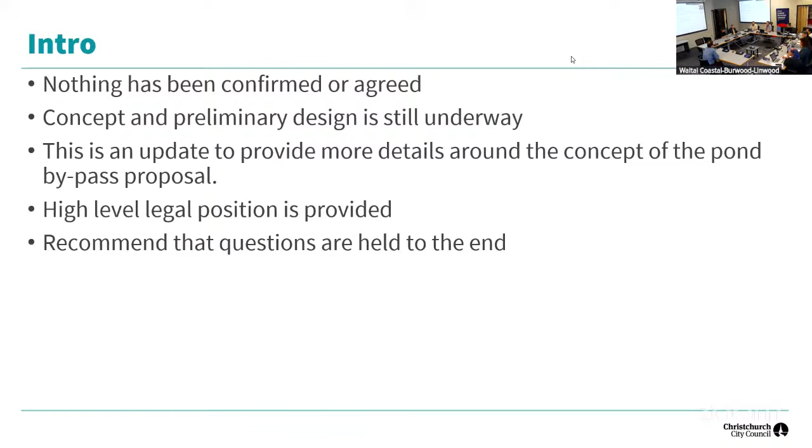What I can say is the concept and preliminary design for the diversion pipe is underway, with a number of council staff working on that plan together. This update is to provide more detail around the concept of the pond diversion proposal. I've also got a high-level legal position in relation to the types of consents we may need — that's not my area of expertise, so I'll essentially repeat what's on the slides verbatim, and that'll be the limit of my knowledge. Again, if we can hold questions till the end, that'll be awesome.

So the agenda: we'll look a tiny bit into the background of why we're here and previous considerations where we've looked at diversion around the ponds in the past. What's the rationale for a pond bypass — why are we even considering it? What would that diversion look like and how would it operate? What are the impacts and risks of that diversion pipe? And we'll go into a bit of detail, since it's been a topic in the media, around the options for disinfection.

That's the chlorine. So a tiny bit of background — you're well aware the trickling filters were lost in the fire in 2021. We installed a temporary activated sludge plant in early '22. Late '22, we installed 16 aerators on pond 1. And 2028 is when the new activated sludge plant is forecast to be completed, replacing the full treatment capacity lost when the trickling filters were destroyed.

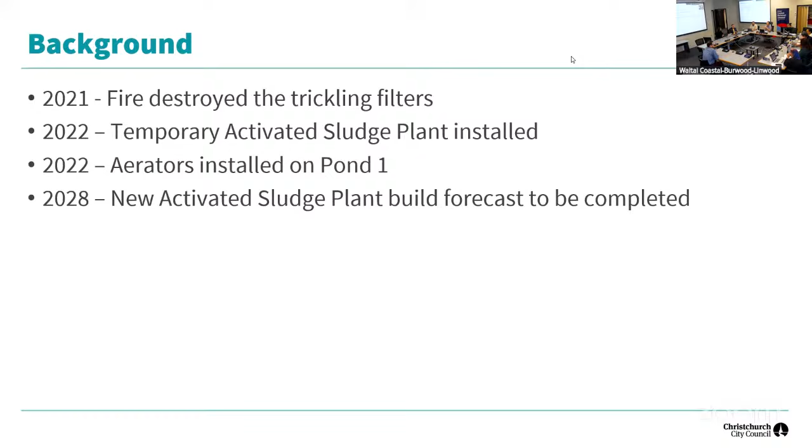Believe it or not, diverting around the ponds is not a new concept. Every time you consider a large upgrade at the CWTP, you have to consider a range of options — do nothing, renew, replace, or do something different. Diversion around the ponds has been considered previously. In 2006, with the ocean outfall, there was consideration of whether we needed the ponds at all, or could go straight to the outfall. But it was decided we needed to keep the ponds.

In 2018, when considering the impact of midges on the surrounding community, we again looked at diverting around the ponds, but instead went for the midge management programme, tackling different stages of the midge life cycle, which was better value than the cost of full diversion. In early 2021, before installing the temporary activated sludge plant, we again looked at all options including bypassing the ponds, and decided the temporary plant was preferred. Again in 2021, aerators on the ponds were preferred over diversion. Each time, pond diversion wasn't selected due to other options having restrictions, environmental benefits, or ability to implement.

The biggest risk of diverting around the ponds is that what comes out the back of the CWTP has a lot of fecals and enterococci, which is harmful to human health. That is the big thing that stops us from typically diverting around the ponds.

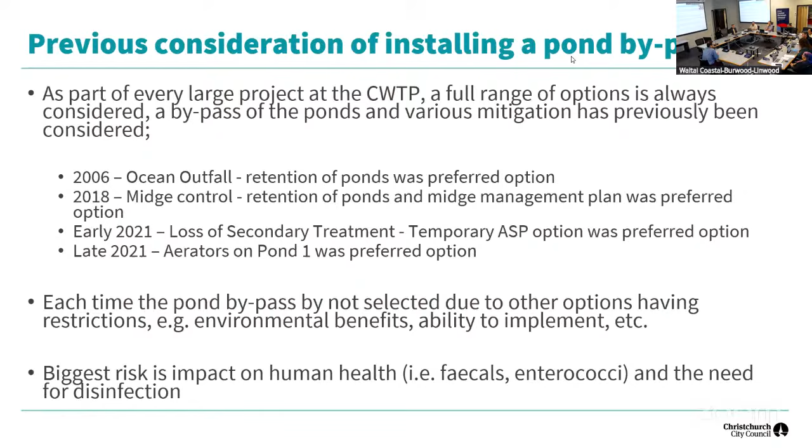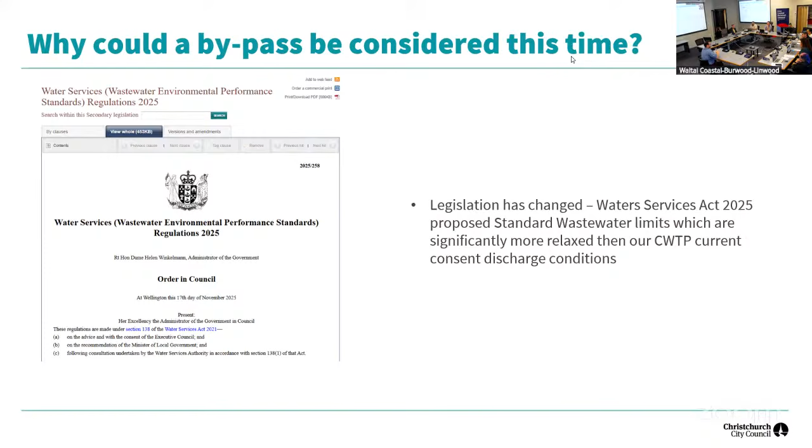Legislation has changed. On the left-hand side is a screenshot of the Water Services Regulations Act 2025. What that did was propose standard wastewater limits, which are significantly more relaxed than the CWTP consent discharge limits. So whereas the current consent limit might be here, under the new wastewater standards there's the option to go a lot looser, so you're allowed to discharge more contaminants to the environment.

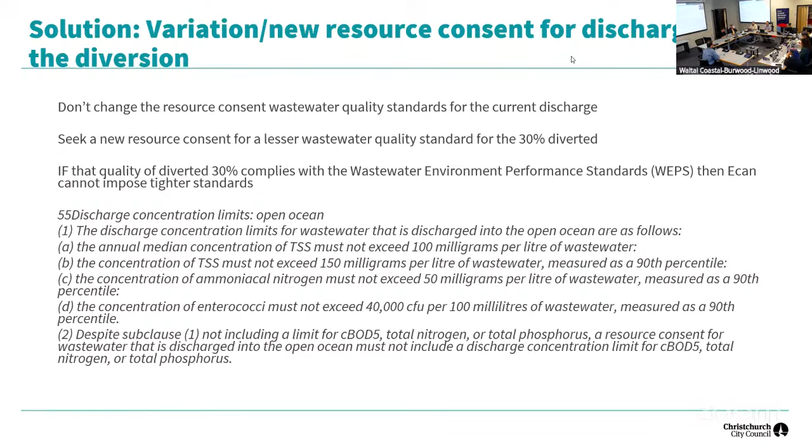Is there risk associated with this proposed diversion around the ponds from a legal perspective? Possibly. ECAN being unhelpful is unlikely. Yes, they've given us an abatement notice, but they've verbally indicated, and had multiple meetings with us, that they are willing to try and do what they can to be helpful. But they have a job to do, and so do we.

So why is a bypass required now? Since 2021, it's been quite a long time - the amount of flow and load sent into the ponds has been higher than it was with the trickling filters. What that means is the ponds have lost their resilience and are becoming more susceptible to CWTP performance fluctuations and weather conditions. Back in 2021-2022, the ponds were still very resilient - they were maturation ponds, slowly converting back to oxidation ponds. After 4 years of sending that high load, the ponds are becoming less resilient. So when we get high loading events and weather conditions exacerbate it, that's resulting in these more significant odour events. We're still 2.5 years away from the new activated sludge plant being commissioned.

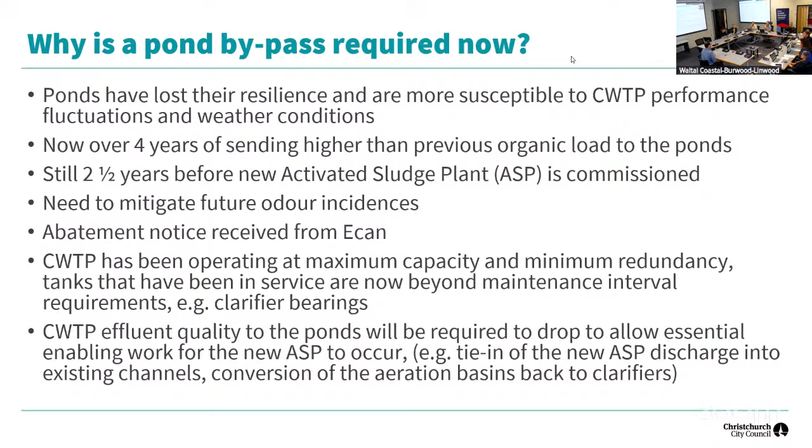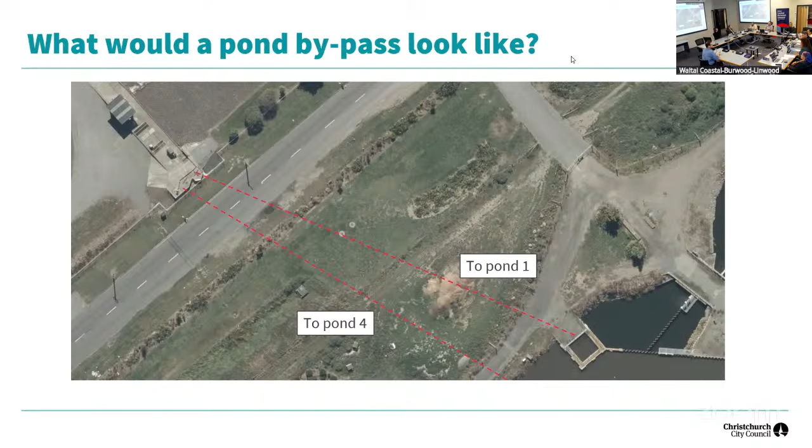What would it actually look like on the ground? What would you see if you're driving past the site? That's on Cuthbert's Road. If you're driving from left to right, the CWTP will be on your left and the ponds will be on the right. We've already got those two pipes disappearing under the road. So the diversion at this point, you wouldn't notice anything different. It's all using existing infrastructure that's already underground.

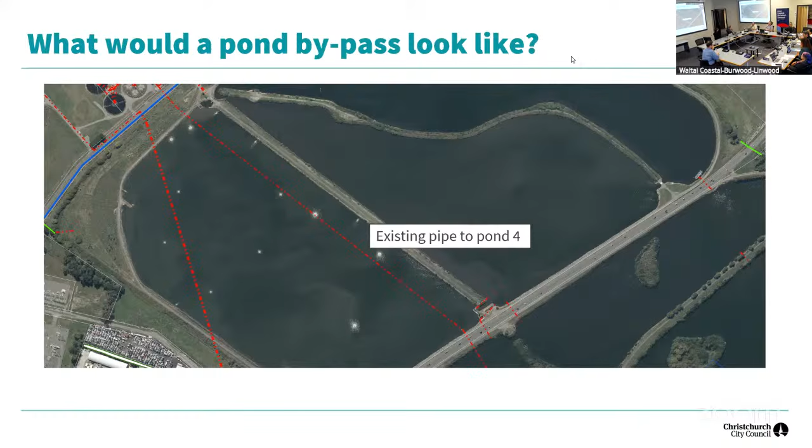What we then do is use that pipe there where it says existing pipe to pond 4. Some of my predecessors had the right instinct to put bypass pipes in, and that one runs straight from the CWTP all the way into pond 4. It goes from CWTP under Cuthbert's, under pond 1, under the state highway into pond 4, which allows pond 1 to be taken offline, so you can drain it, empty it of sludge, for normal operational maintenance. So that is the pipe that is proposed to be used.

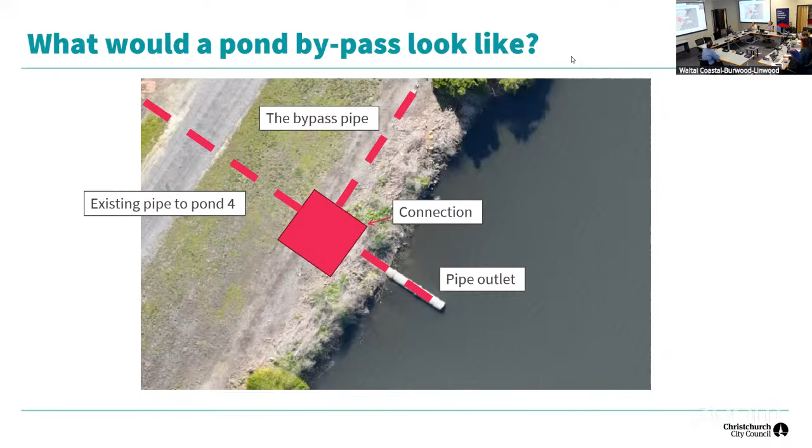At the end of that pipe, what's proposed is you break into that pipe somehow. Apologies, I'm not a civil engineer, hence why it's a red box. They'll break into that pipe and using pumps and pipes, they'll make a connection into it. So they intercept it and then pump it, shooting straight up. In the bottom left-hand corner of the picture where the big, thick red dotted line is, that's your break into the pipe, and then it connects into an overland pipe secured onto the ground. I understand it's going to be a 630 millimetre internal diameter pipe, about that big. It's going to run from there all the way up alongside the state highway, across the top of Pond 3, round to the right, around the top of Pond 6, and then drop into the ocean outfall pump station. So if you want to see anything on the diversion, that's what it would be.

It'll be a pipe secured on the ground, running along the state highway, along our path, on the far side of the state highway.

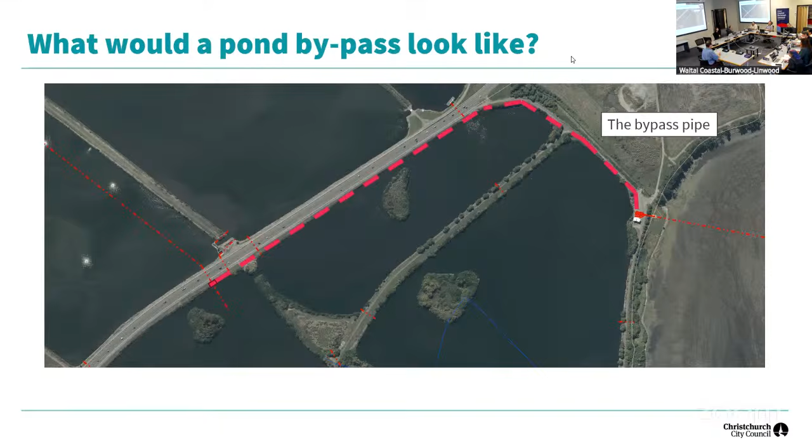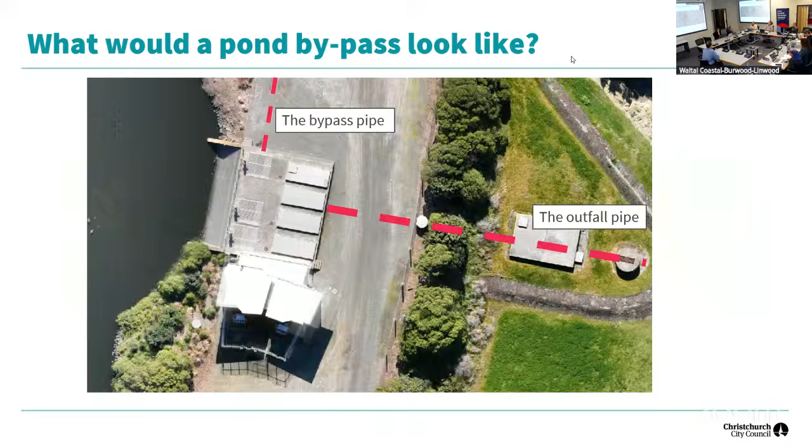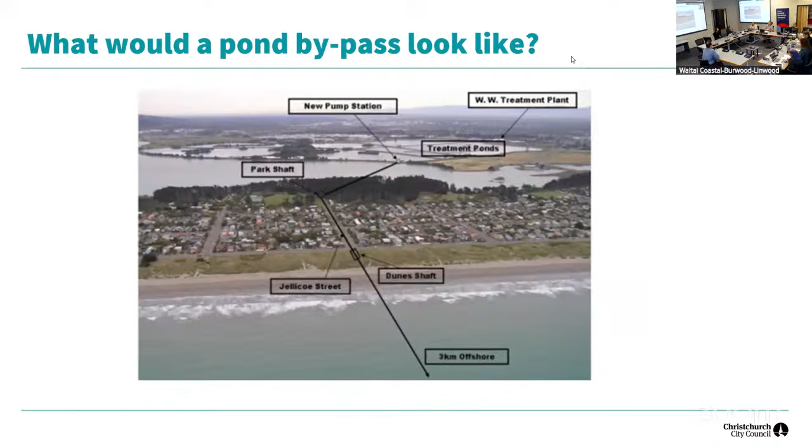When it gets to the ocean outfall, details not confirmed. Somehow it will discharge into the ocean outfall, and then it will use the existing ocean outfall pipe, which you can see is that big red dotted line. It goes through those few chambers, disappears under the estuary, does a slight left turn, runs under Jellicoe Street, under the sand dunes, and then disappears out to sea. So in the New Brighton area, you will not see any difference. You won't see any temporary pipe work above the ground or anything like that. And yeah, just a nice aerial shot of it as well.

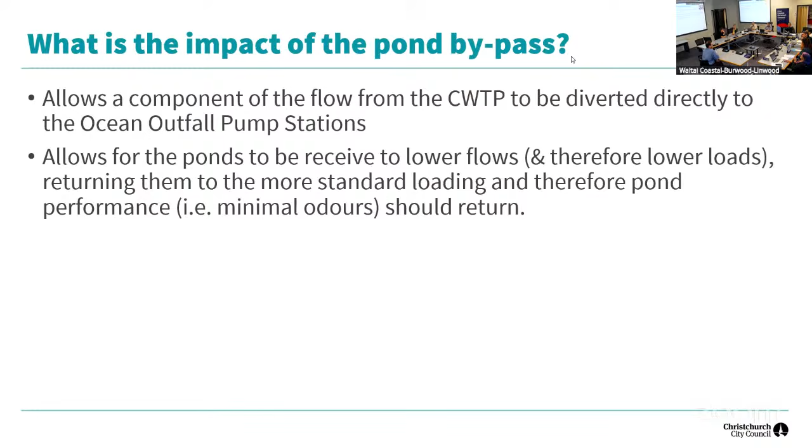So what is the impact of the pond diversion? The diversion would allow a component of the flow from the back end of the CWTP to be diverted all the way around to the ocean outfall, bypassing the pond systems completely. That would allow the ponds to receive lower flow and lower load, letting them return closer to normal operating parameters. If we can get the ponds into a lower load, lower flow environment, they should return better performance and should not produce as much odour.

However, if we're bypassing that load all the way past the ponds, what does that mean? It means there's going to be higher organic loading in the ocean outfall in terms of BOD, total suspended solids, and ammonia. We have done some preliminary analysis, so it's not verified yet - it's just high-level figures and numbers. We're going to have to work through them in more detail.

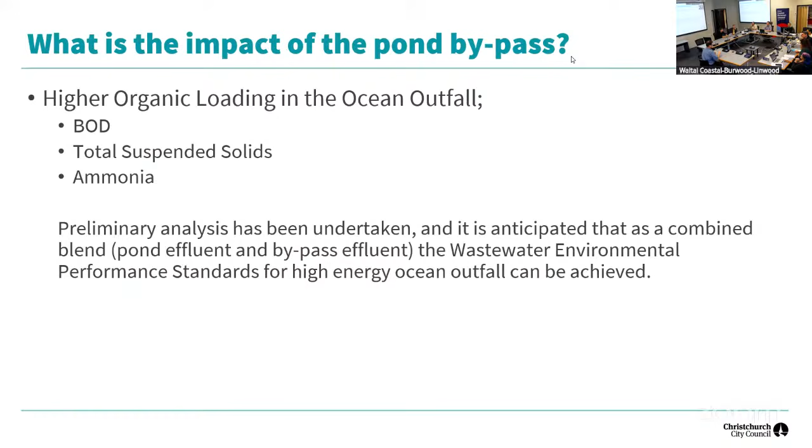But it is anticipated that as a combined blend - you've got the normal flow coming through the pond to the ocean outfall, plus this component of flow picked up from the CWTP joining at the ocean outfall - what goes out into the ocean environment will meet the wastewater environmental performance standards for the high energy ocean environment. So that is where I say we can look at doing this discharge under the new WEPs.

There's 2 components to what we're sending out. One is the increased organic load. The second is the nasties, which is the fecals, the enterococci, and the E. coli. These are things that, if you get them into yourself, can make you ill. The only way you can get them to the safe limit under the WEPs is to provide some form of disinfection.

Stepping slightly back from the diversion aspect, the ponds provided all the disinfection treatment needed, naturally. So all the fecals, enterococci, E. coli that came out the back end of the CWTP untreated were fully disinfected by the time it gets to the ocean outfall pump station. How did it do that? Natural UV radiation from sunlight, and natural predation from other bacteria and algae.

So fecals, enterococci, and E. coli - they're the stuff that lives inside your body. They like it nice and protected. If you put them in an open pond environment, they don't last long - they get eaten up by other organisms. The other thing is they naturally settle out. You've got between 17 and 30 days retention time in the pond, which allows a lot of time for that stuff to settle out naturally at the bottom of the ponds.

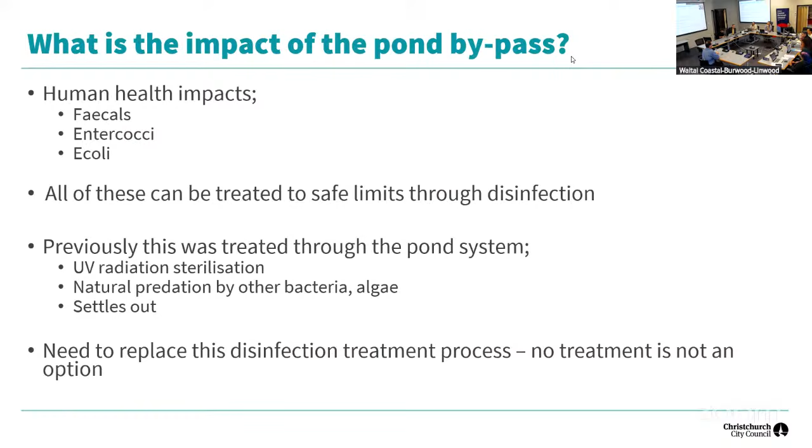If we're diverting around the ponds, we need to replace that disinfection and treatment process. We cannot put any diversion treatment process in place with no disinfection. We will not meet the WEPs, and we'd put bacteria out to sea, which has human health consequences. We have to put a disinfection process in place.

Turbidity tolerance: if you put chlorine or a chemical in, it mixes quite readily through the column. But if you're trying to treat it with UV and it's quite turbid, not particularly clear, some of the bugs and bacteria can hide behind those little bits and pieces, so it's not quite as effective.

The next big one is disinfection byproducts risk. If you add chlorine, it reacts with the organics and forms something called disinfection byproducts. Because there's a whole range of different organic materials in there, it forms a whole different range of disinfection byproducts, and that's not particularly great.

In terms of operational complexity, it's about whether things are nice and easy to put in or whether they're quite difficult and complex. A consultant has been engaged to undertake a high-level feasibility study of all these options, which will be returned to us. We'll look at it in-house and then present it to the councillors.

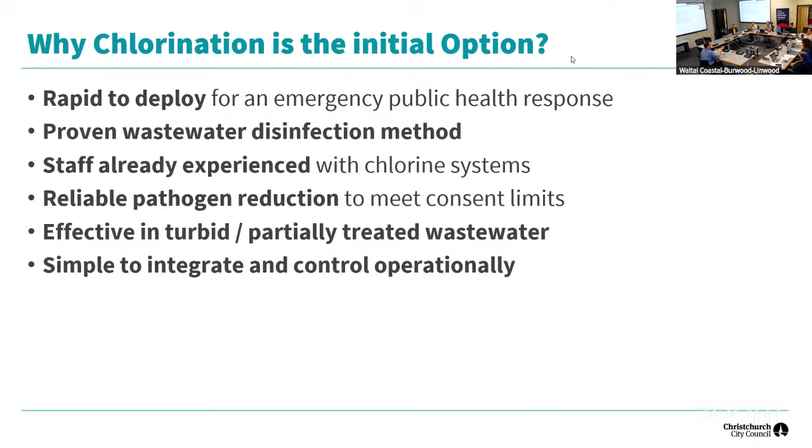However, as discussed, there are significant risks of using chlorination. As touched on before, if the chlorine dosing system gets a confused signal about what the pumps are doing, it could put a whole load of chlorine into the line. It may be that it's going into that pipe, getting all the way to pond 4 while the pumps aren't operating, ending up with a whole load of chlorine going into the ponds. Chlorine doesn't just kill bugs and bacteria, it tends to be pretty good at killing everything out there as well.

The last thing you want is to dump a whole load of chlorine into the ponds and cause them to die. The other thing that might happen is the bypass pumps are pumping, but for whatever reason the chlorine dose isn't working, meaning the partially treated wastewater goes out to the ocean without disinfection, increasing public health risk. So those are the two real big ones.

The next risk is slightly more localized: chemical safety risk. The amount of chlorine you have to add is quite significant, meaning you'll need big storage tanks to hold it. There's also environmental toxicity, residual chlorine can be harmful to aquatic life if not controlled, and that's what the consultants are looking into in more detail for us. Disinfection byproducts, as touched on before, you add chlorine, it reacts with the organics and causes disinfection byproducts.

Sorry, I'm not pronouncing what I'm reading here correctly, but the DBPs are something I'm particularly concerned about. Can you explain more about them and why they're a risk?

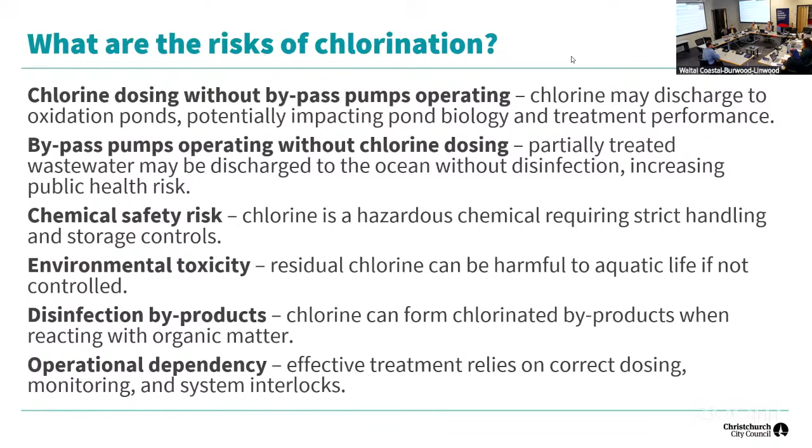In addition to the diversion around the ponds, we're also looking at a second project progressing in parallel, which is to put additional aerators on ponds 2A and 2B. At the moment, majority of the flow, majority of the time goes into pond 1. We want it to go into that one because that's where all the aerators are, and that allows us to put a lot of oxygen in to do the treatment.

What we found with the high flow is that it's simply been overwhelmed. So we have the ability to split the flow. We can send a portion of the flow to 2A, a portion to 2B. We put aerators on there, so we provide some of the treatment in there, and it reduces the flow and load into pond 1, and that gets it back within its normal operating parameters.

So by putting additional aerators on 2A and 2B, it allows us to take the load off pond 1. This will allow the flow and load to do the additional treatment for us and allow ponds 3, 4, 5, and 6 to return to the maturation state that we had pre-fire.

CCC staff have been working with a consultant and have developed a technical specification. You can't just say, give me some aerators. We need to go out to the market and say, with a bit of science behind it, what aerators we need, how many kilowatts, where they want to be, etc.

And we've also had to do the flow and load scenario to make sure we're requesting enough aerator to go on there, what proportion of flow and load to be able to treat. And we've got in contact with an aeration supplier, and there's discussions ongoing.

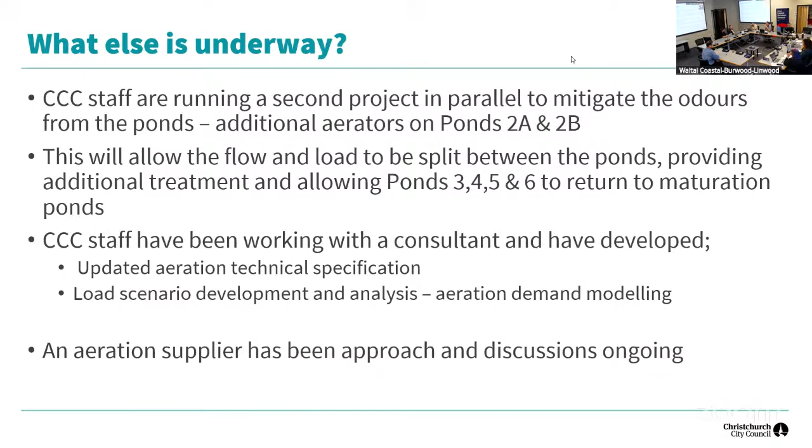I'll start off with some questions and then go to Jackie's got her hand up first. And some of these have been provided very helpfully by Don Phil, who's sitting behind you.

So what would be the approximate timeline to build and commission the bypass? I haven't got those things to me at the moment. All I can say is it's big. We are working on it. There's a number of staff working on it, consultants and contractors. But I'm unable to give a date at this time, I'm afraid.

So that means you couldn't say the earliest realistic date for it could be. So what are the steps before we know some of that information? So I'm operations, I don't do capital delivery, I'm afraid.

So my understanding is you have to come up with a concept. We've got a concept, we're still working on how much flow we want to get through it, for example. Do we want to get 300 litres, 600, 1200 litres a second for it? If you do that, then that determines how big the pumps are, how big the pipe has to be.

You then need to do your preliminary design, which says, right, so we know how big the pumps need to be, so we know how big the power is, we know where it's got to go, we know what shoring we've got to do, what foundations we've got to put in place. And then also, if you know the flows, you then have to work out what your disinfection treatment process is and all the associated stuff with that.

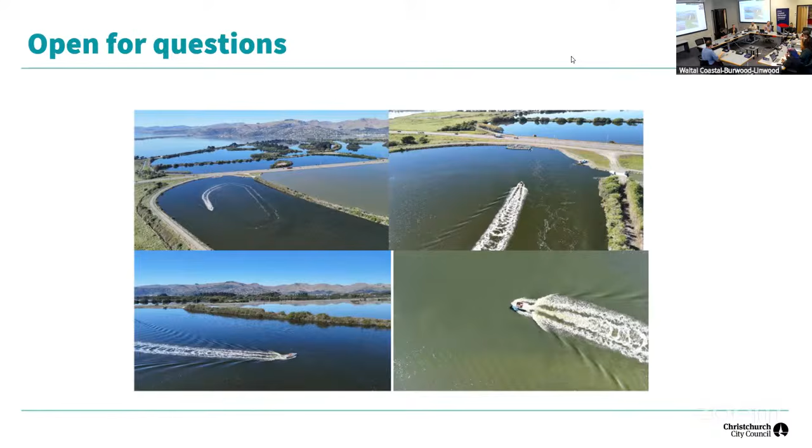And so in terms of, because you've sort of mapped out broadly the difference in time for the possible options, we'll go back to that next time. So sorry, yes, yeah, so we've got sort of like low, medium, very high, and very fast. Like at the moment, we don't have any way of gauging what is meant by those things.

No. So I can give a bit of an example. Chlorine would be a big tank with a pipe coming out of it with a little pump on, and that pump will be controlled by a flow signal, which you get in from the diversion pump. So the diversion pump, when pumping, sends a signal. That pump says, that's pumping, I need to pump as well. And it'll have a set rate, it says, I know if that's pumping, I need to provide this much. And it'll just start pumping, go down the pipe, and be injected into the pipeline. As soon as the pump stops, it'll stop.

So the costs associated with a tank, a pump, a bit of electronics, a bit of signal, a bit of safety interlocking, necessarily bunding and spill control around it - that's it. It's not significant.

If you go to the other end where you need to create an ozone creation unit, you're talking a designed shipping container, for example, with an ozone generation unit with great big powers to it, great big controls, and then all the flow and controls that go into it - that's not as easy as getting a tank with some sodium hypochlorite in it.

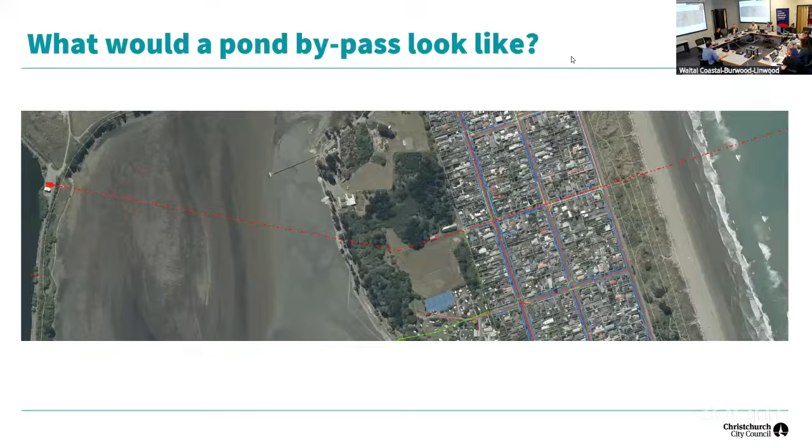Jackie, and then Greg. If I can just pick up on that, I tried to sort of explain it at the start. In terms of impact on the environment, as long as the proportion of the flow that's diverted isn't excessive, we should be able to meet the Water Services Act. So when that's gone through, it's gone through.

Yes, but the standard has been massively dropped. If you look at those numbers, really significantly dropped. We'll hopefully be able to make the new lower standard. Back in 2006, I submitted on the ocean outfall plan, and I thought that what we went with wasn't good enough for environmental reasons. And now we're looking at standards that have been lowered.

So you've got operational realities that your job is to deal with, but the bigger picture is, we don't want to solve one problem and cause more problems. I know that there's no perfect solution, but that we're only potentially going to make a lower standard is very worrying.

I'd just like you to correct me if I've got this wrong, but earlier you said that when the new sludge plant comes on, you need this diversion then as well? Temporarily, while we make the connections into it, yes. But would that be a similar diversion to the one we're proposing at this time? No, sorry, it will be - I've got a nice image somewhere, I think I have.

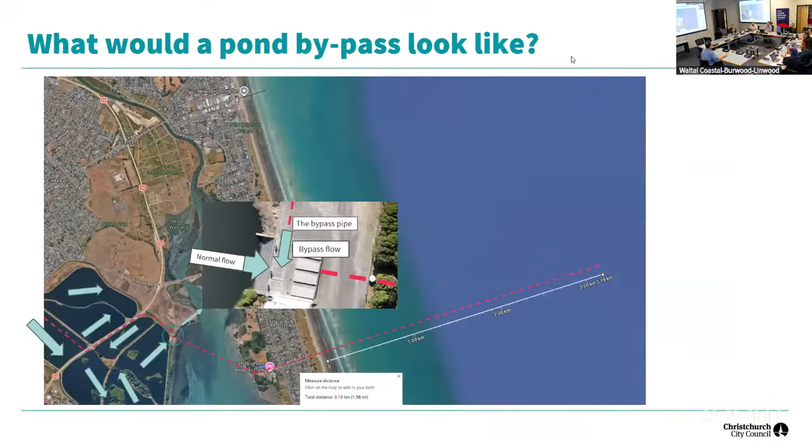Sorry, normally I've got a nice image of the wastewater treatment plant somewhere, which of course I haven't got. So if you can imagine where the trickling filters were, basically there's a pipe that goes past it, which then goes into the temporary activated sludge plant. When we do the bypass, we just have to bypass the trickling filter and the temporary activated sludge plant to make the new connection to the new WWTP at the front end. So that's not a case of diverting it? No, so when I say bypass, while we create the new ASP, that's an internal bypass within the WWTP, not the ponds. That's fine, thank you.

Greg. Do you have any idea how long it would take for the pond health to recover sufficiently? Going right back to 2021, when we looked into this, there is no comparable global event where we've lost a secondary treatment process to try and understand what was happening with the ponds system. We have learned a lot over the years. It's taken a long time to get to this stage where the ponds have demonstrated they consistently struggle with variations in load and variations in weather. In terms of restoration, it's a bit of an unknown.

However, what I would say is if you go down the aeration route, we will be designing to have a fairly high level of aeration. If you are able to keep the dissolved oxygen levels positive, which of course is what we are aiming for, it prevents the anaerobic conditions which result in hydrogen sulfide generation. What it also does is ensure there's plenty of dissolved oxygen in the ponds in order to have the aerobic breakdown of the sludge at the bottom of the ponds.

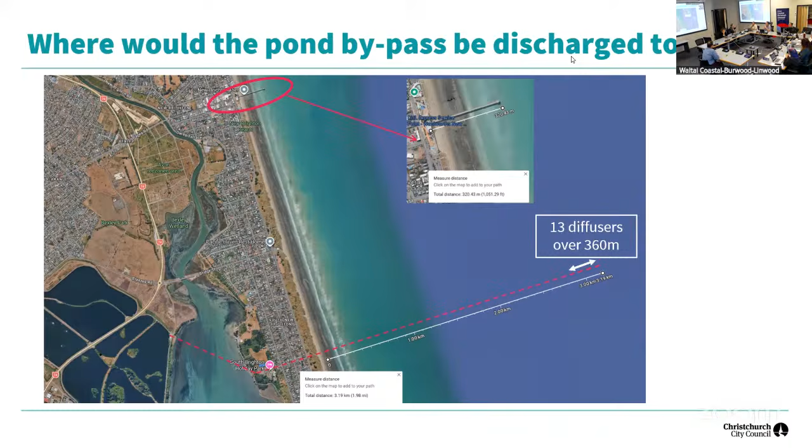Again, I don't know if you can answer this, but on the consent, could you put the consent slide back up? So is there any chance that the proposal could fit within these consent limits?

No, zero chance, sorry. So no chance at all that the proposed bypass could meet the current consent conditions? With the flow that's going through the ponds at the moment, we are fully compliant with our resource consent, which is everything on the right. If you put your diversion in, what's coming off the back of the CWT would exceed our current consent limit. The TSS may jump. At the moment TSS is quite low, but it will certainly exceed 50, though it shouldn't exceed 100 or 150. So if I put the diversion in, I can't meet my current resource consent discharge limits.

Okay, never mind. Just two more quick questions from me. Thank you.

It would seem apparent looking at the slide with the risk that the chlorine option seems to have the highest risk around harm to the environment. The peracetic acid and the ozone seem, and again I don't know, so it may be helpful.

So the peracetic acid one has DBP risk very low, operational complexity low, deployment speed fast. It seems like a sensible option. Can we rule out chlorine now and just focus on one or two of these that are less risky but just as impactful?

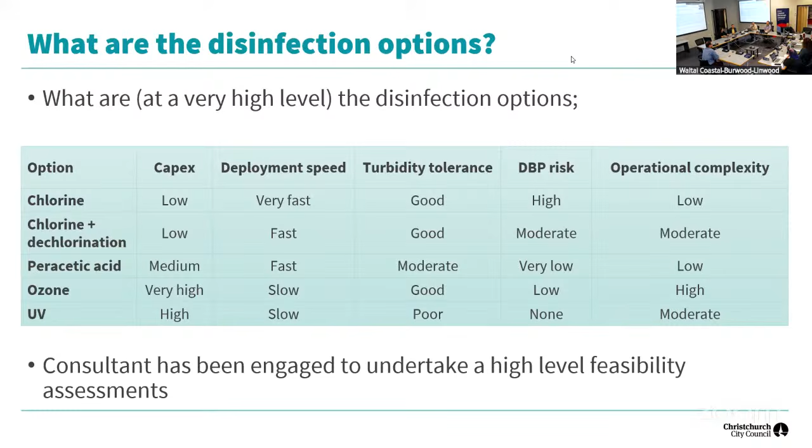Thank you very much, Adam. I'm sure there are many more questions we'll have over the next week or so, which we can send via Cindy. If you could - obviously I'm operations, so I only know a certain component of it. If you flick it through, we can make sure it goes to the correct community or legal people.

We don't want the plant to fail. We don't want it to stink, and we don't want to damage the environment. All of those things are really important, and we've got a difficult job on our hands. Thanks for all your work, keeping that plant running. Thank you very much.